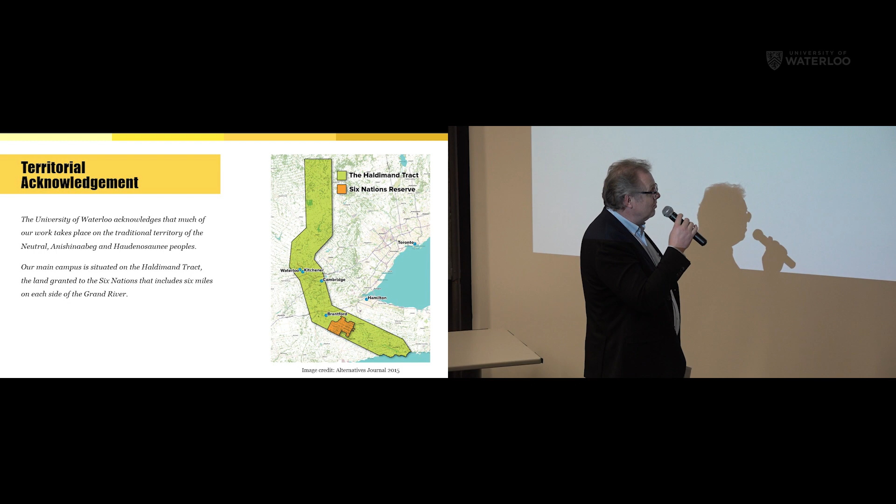So we're located on the Haldimand Tract, highlighted in green. That was granted to the Six Nations in the 1800s. It's 6 miles on each side of the Grand River, as you perhaps know, and a fraction of that nowadays remains, which is the Six Nations Reserve.

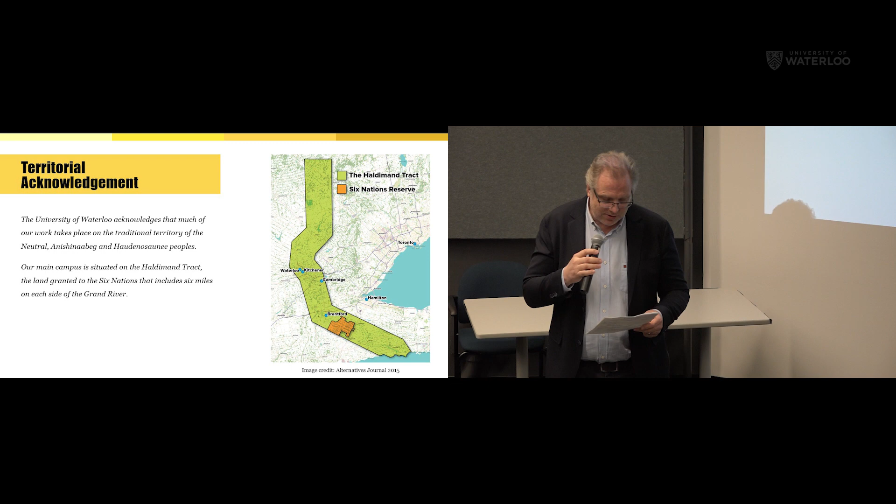So the University of Waterloo, the Water Institute that I represent, we work on the Truth and Reconciliation recommendations, and our work towards reconciliation takes place across our campuses through research, learning, teaching, and community building, and is centralized within our Indigenous Initiatives Office. So with this acknowledgement, I'm very happy to introduce the speaker of today.

Next slide. Yeah, next slide, please.

A guest of Professor Ponnu Kumaraswamy from Systems Design Engineering. He's not a fellow countryman, but he lives and works in a country where I originally come from, in a very big water institute called Deltares. It's one of the largest, maybe the largest water research center in the world.

We've had people from Switzerland in Europe here as well, from Eawag, which is another big European research center, where around 400 people work. There are twice as many people, I believe, in Deltares. So Dr. Bernhard Becker is a senior researcher and advisor there. And he's also affiliated with the Aachen University in Germany, not very far from the Netherlands.

I have a very short speaker bio sketch for you. Dr. Becker holds a PhD degree in civil engineering from Aachen University, where he is also still affiliated, and he has more than 13 years of experience working at Deltares, where he is a senior advisor and researcher and a hydro modeling expert. I think Dr. Becker will talk a little bit more about Deltares in his presentation.

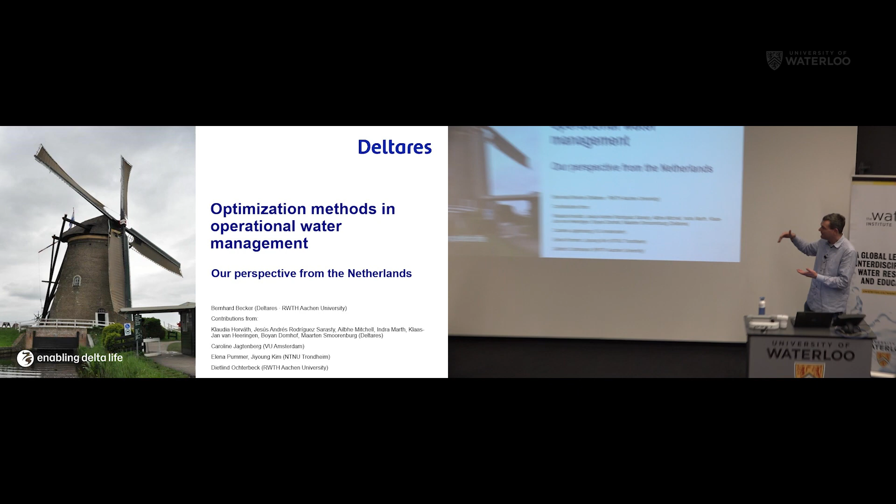But it's an event where water-related researchers and practitioners from all riparian states of the Meuse Basin, that originates in France, isn't it? Yeah. The spring is in France, Belgium, that's Wallonia and Flanders, and then the Netherlands, and there are also tributaries in Luxembourg and Germany, so many countries. Yeah, and this symposium is the 9th edition this year, so 10th anniversary. And you bring practitioners from all these riparian states together with the academic researchers to exchange knowledge on hydrological modeling of the Meuse catchment on a scientific basis.

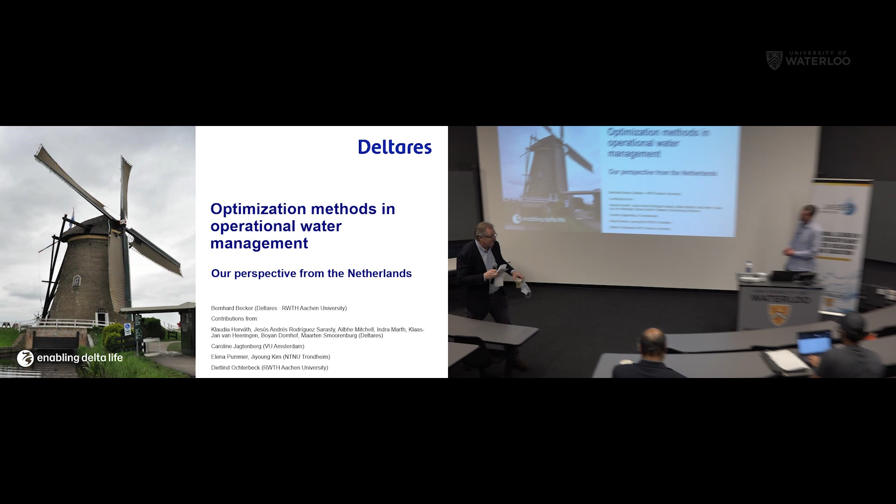Title of my talk is not the Meuse, but it's optimization methods in operational water management. And I would like to share some advances from our side, from a perspective from the Netherlands. Here you see a windmill. I think the Netherlands is very famous for windmills. Most of the windmills, you can see water here. They are not for grain, but they were constructed to drive pumps to drain the water.

Outline of the talk: a few words about Deltares, and then decision support for operational water management. Very briefly, the basics of optimization in operational water management. And then I have a few examples for reservoir optimization and goal programming, and also hydrological uncertainty, the ensemble optimization, and last item, nonlinear optimization for hydropower scheduling. And this is maybe the opposite of pump operations. Hydropower produces power and pumps consume power, but it's a similar optimization problem.

Okay, a few words or a few slides about Deltares. Deltares is an independent institute for applied research in water and subsurface in the Netherlands.

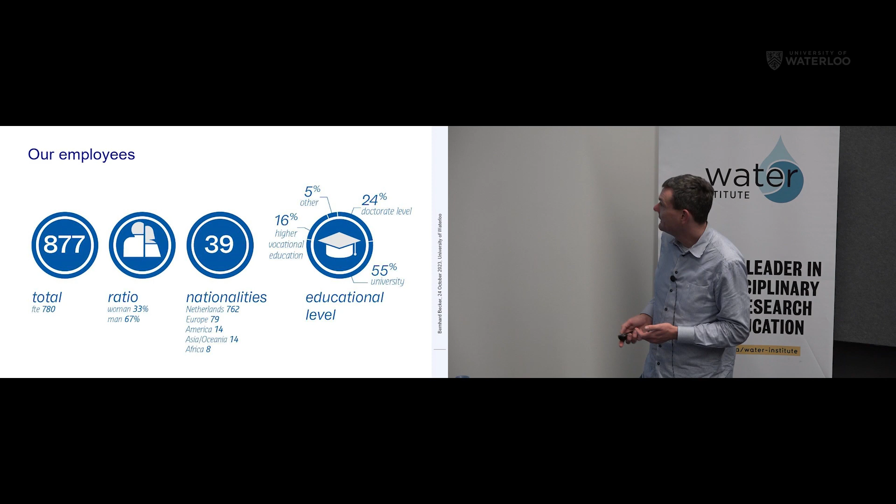Deltares has 877 employees, full-time employees it's a bit less. 1/3 female, 2/3 male, and 39 nationalities work at Deltares. The most from the Netherlands. I belong to the group of Europe. I'm originally from Germany, and quite a high educational level, I would say. Yeah, it's a research institute.

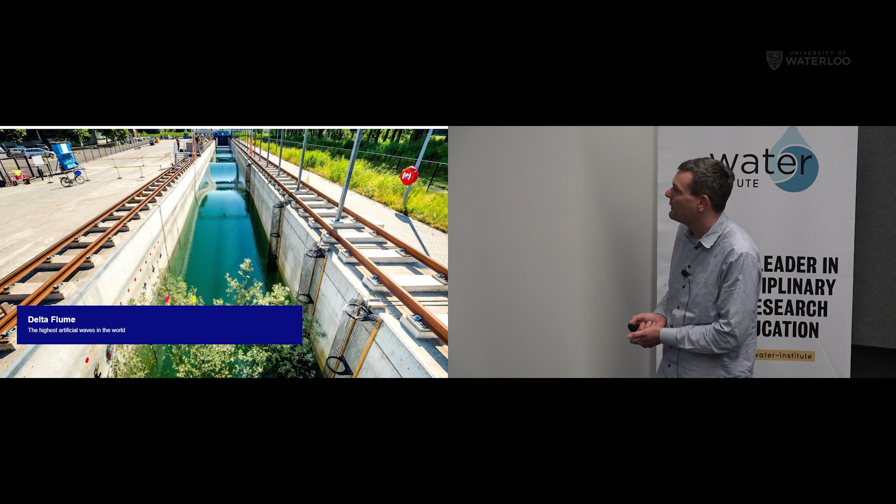We are very proud of the Delta flume. This is not the largest experimental flume of the world, but the one that produces the highest artificial waves in the world. And here you see the wave, and the question here is what the effect of plants is on wave damping, on coastal flood protection with plants.

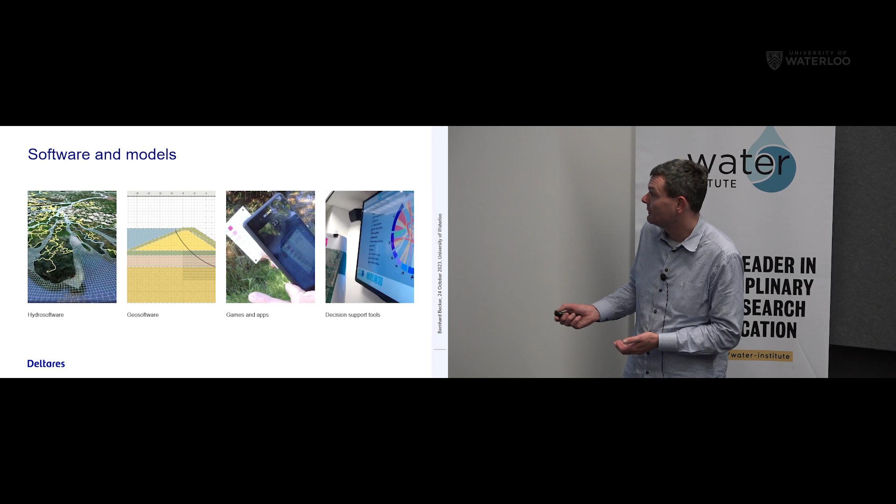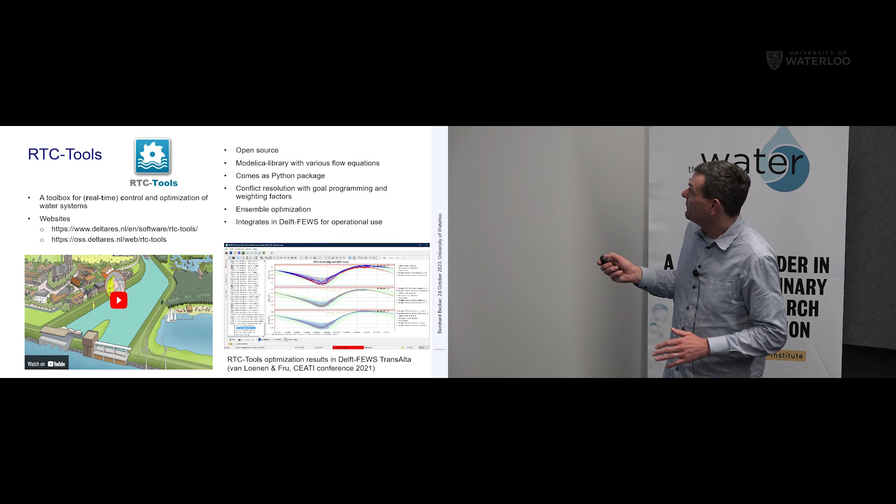And now RTC-Tools, that's a very small product, but this is about optimization. This is a toolbox for real-time control and optimization of water systems, also an open source product. I will not go into details now, but the next slides are related, in most cases, to RTC-Tools models. Yeah, decision support for operational water management. I brought some slides from a decision support system to give an idea why we are doing this.

The Netherlands is located below sea level, or most parts of the Netherlands, and this means that we have to drain the country with the help of canals and ditches. A pump station pumps the water up to canals, and from there it goes to the sea. Here the windmills, these are the historic pumps. Hundreds of years ago, there were no pumps with electricity or diesel engines. It was driven with windmills.

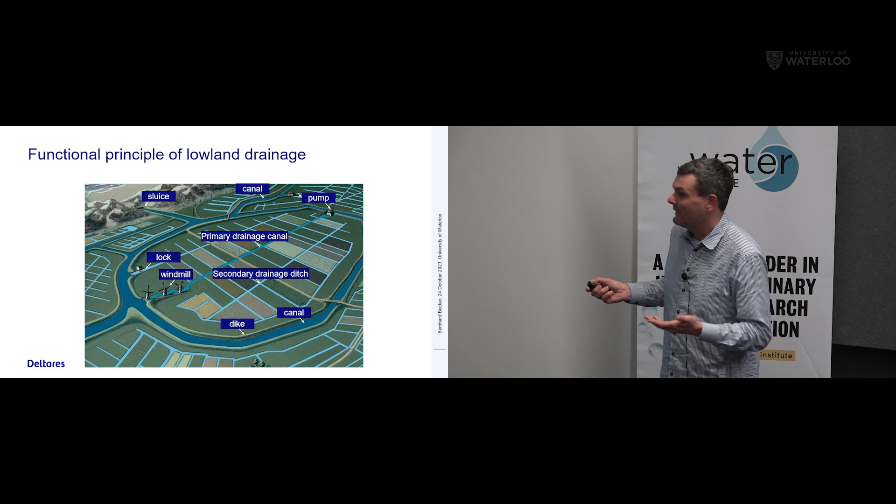And also the dikes are very important. So we look up to the water. Usually where we live, the water is above us and not below. The challenge is then that the water goes to the sea but not back. We don't want to have salt in these canals because this is also a freshwater resource. The regional water authorities are responsible for maintaining a target water level in the canals in the operation area.

And this is an example from Noorderzijlvest Regional Water Authority. There's a large sluice complex here to drain the water from the Lauwersmeer lake to the sea. This can only be done during low tide. And there are several pump stations arranged here at the major canals, and from there the water is pumped towards this reservoir. And this is quite complex management, and there operational decision support systems have been developed.

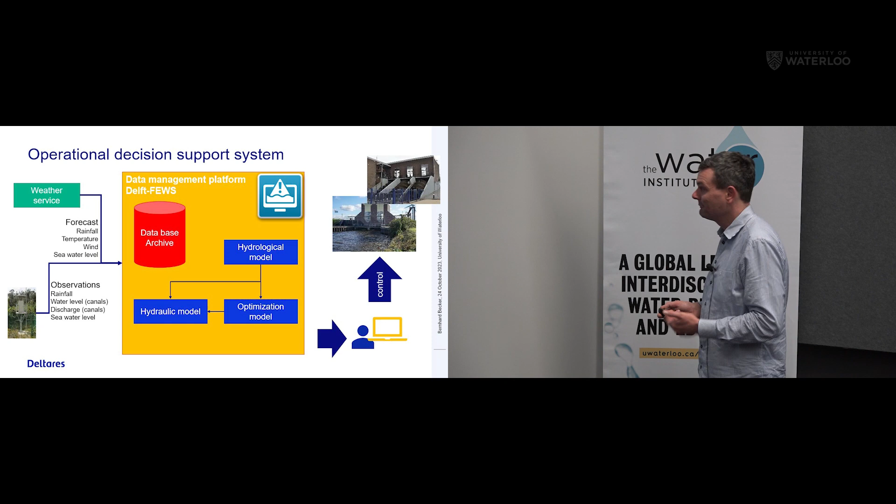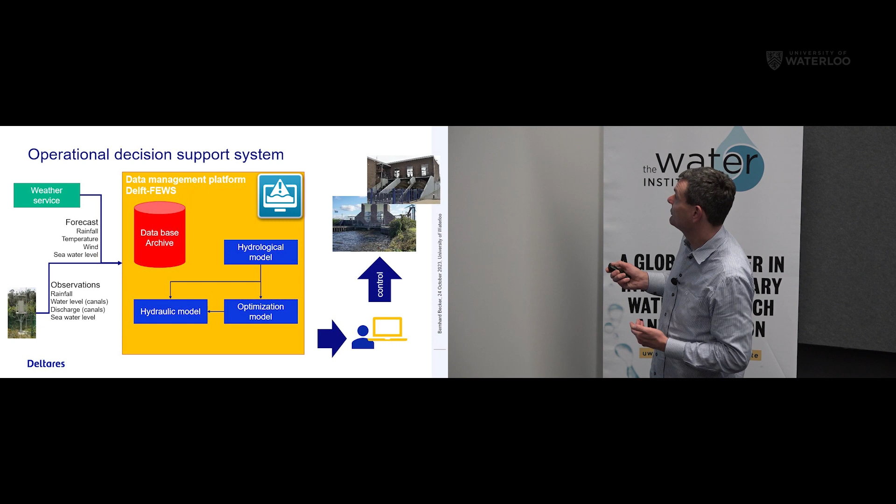Here's a simple architectural figure. The data management platform, this is the Deltares software, collects data from the weather service, rainfall, temperature, wind, seawater level, forecast data, but also observations. And then it creates boundary conditions for different hydrological or hydraulic models and also an optimization model. And these models are automatically executed, and the results should support the operators with decision support for control of these structures. Here a pump station and sluice.

This is a one-dimensional hydraulic model, and here with the time slider, the operator can look into the future, look at results for a future scenario, and then colors indicate if there's a bottleneck, a problem or not.

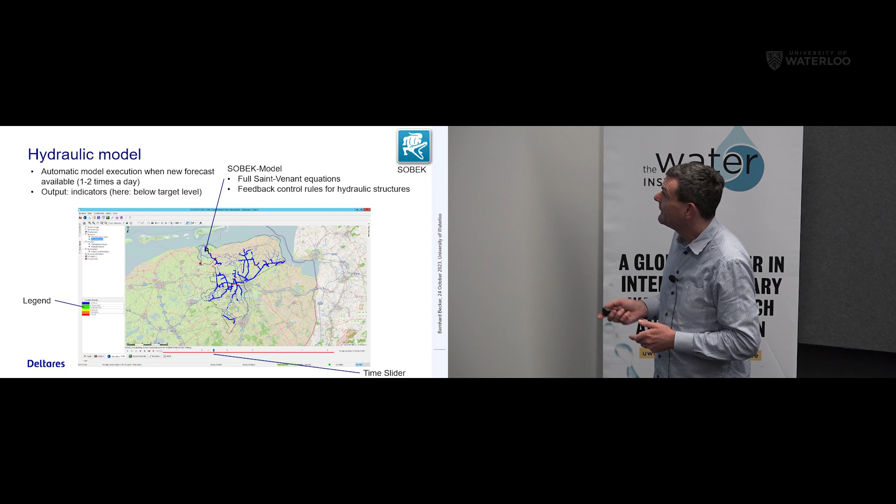And this is finally an optimization result created with RTC-Tools. Here you see the rainfall that is expected for the future. The vertical line is current time. Here we have the seawater level. You can see the tidal pattern.

And this gray line, that's the operational range for the inland water level. And here this line, this is the inland water level. It should be within this operational range. To achieve this, the rain falls onto the land, and it must be pumped out or with the help of the lock discharge.

And this is only possible if the inland water level is above the sea water level. But there are only a few time windows where this is possible. The rest of the time, here the pumps, blue and red, must operate. And here preferably we use gravity discharge via the sluice if possible, minimize pump costs, but preferably only during working hours.

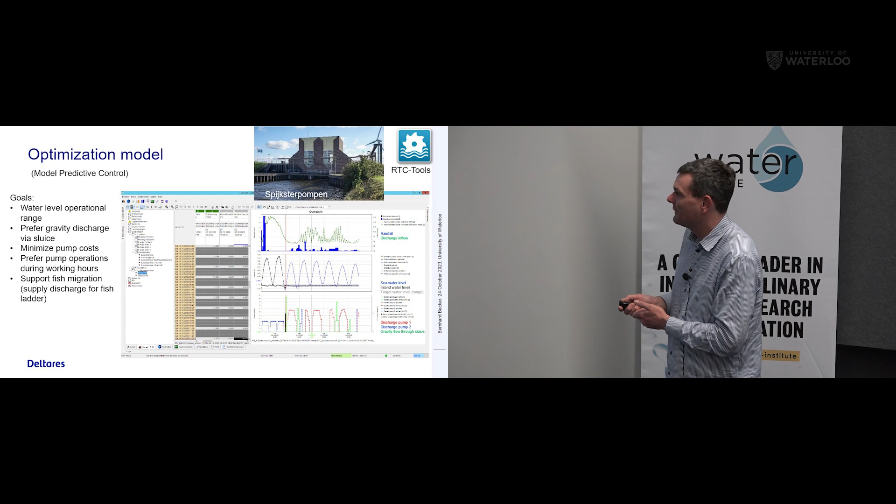And then we have also some obligations for nature, environment, for example, to supply a discharge for a fish ladder. This is to give a bit of an idea why we are using optimization techniques for water management. And water management here in this context is a time frame of one or a few days in the future. So it's not the whole year round. We look at the short-term time scale.

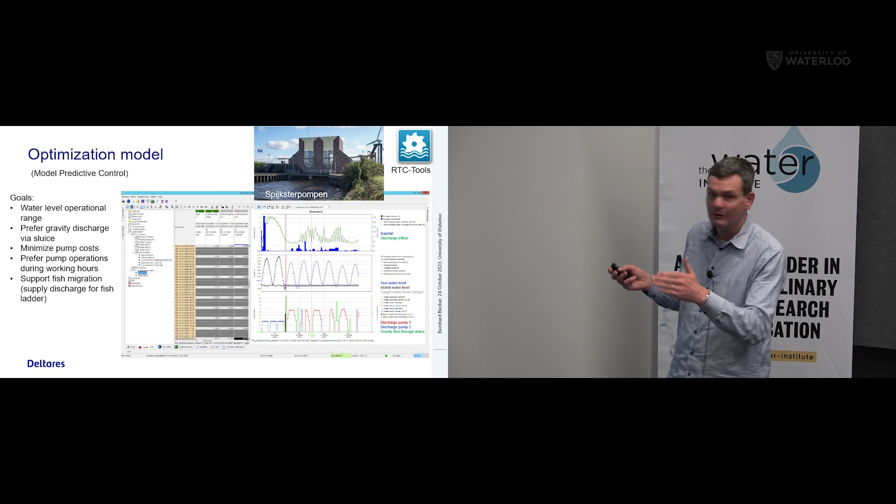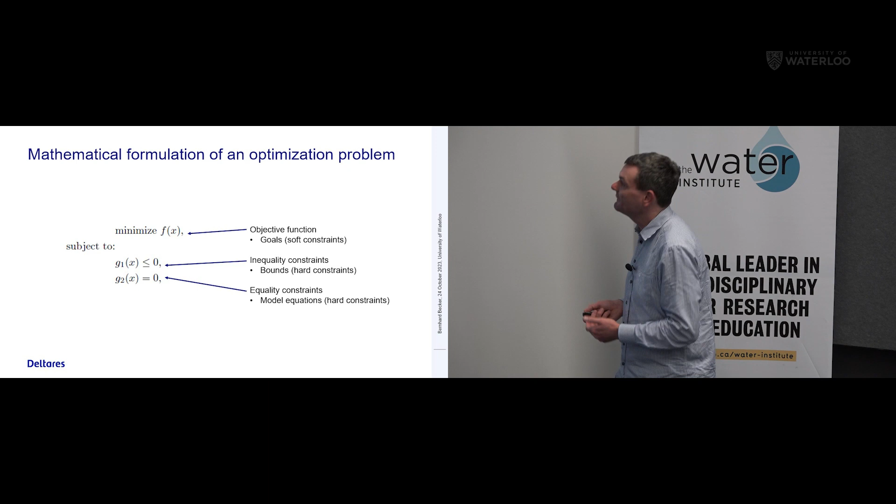And when we use optimization models for water management, we go for exact optimization, or mathematical optimization in a closer sense, and not the heuristic methods, because these methods can lead to a global optimum, or at least a consistent, stable result. I will say more later. Usually they are faster than heuristic methods, but the problem is that they come with mathematical restrictions. So it must be linear equations or a convex problem and all this.

Here, different optimization types. Heuristics don't come with a guarantee for a global optimum, and potentially a little change in input can produce a completely different result. And this is not helpful if you repeat the optimization a few hours later with a slightly different forecast; then you would like to have consistent results. But they are less restrictive in terms of mathematics. On the other hand, constraints cannot so easily be included. Techniques, maybe you're familiar with, are genetic algorithms, ant colony technique, or simulated annealing.

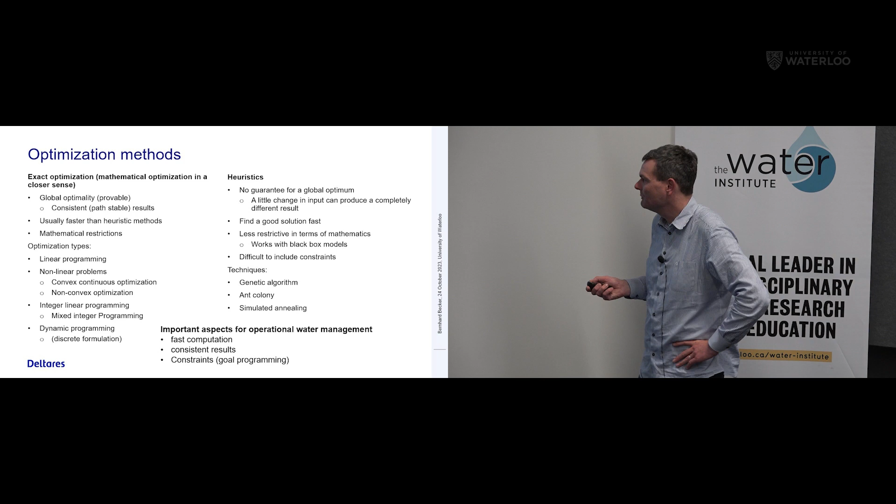But for operational management, we go for this because of the fast computation, consistent results, and constraints we need for goal programming.

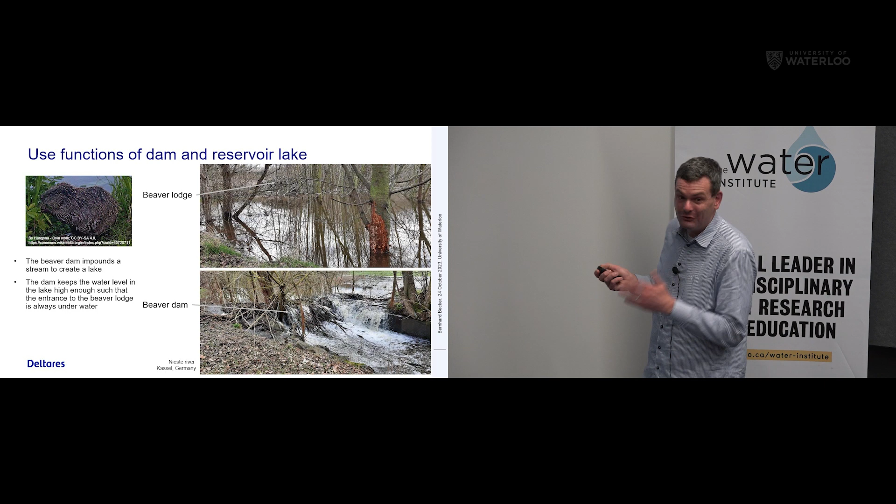Here's the next slide's example of a reservoir optimization model. Why are we doing that? Here's an example of a beaver dam. This is not optimized, but the beaver makes a dam to impound a stream to create a lake. Here's the beaver lodge, and the idea is that the entrance is always underwater.

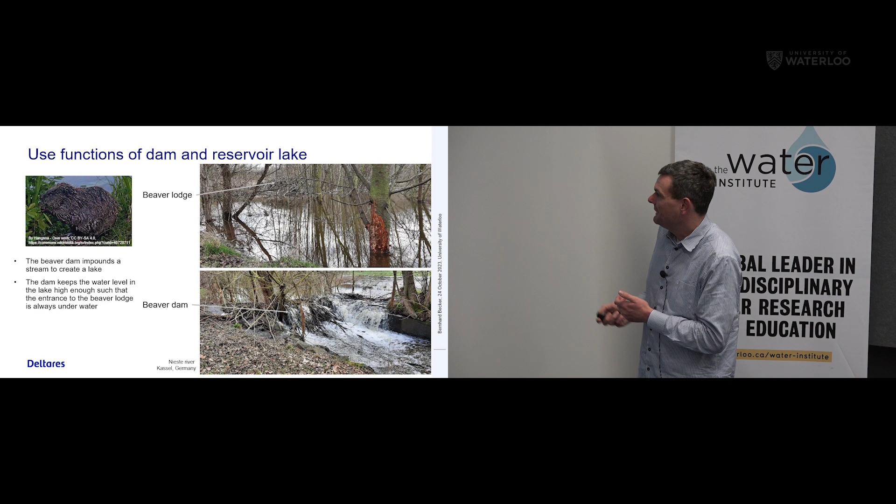For man-made reservoirs, it's a bit similar but more complex. For hydropower production, we want a high water level. Flood protection is another use case, usually in conflict with hydropower: the reservoir filling level should be as low as possible. So here we have a conflict, and that's where optimization comes in. Make best use of the storage volume and the water.

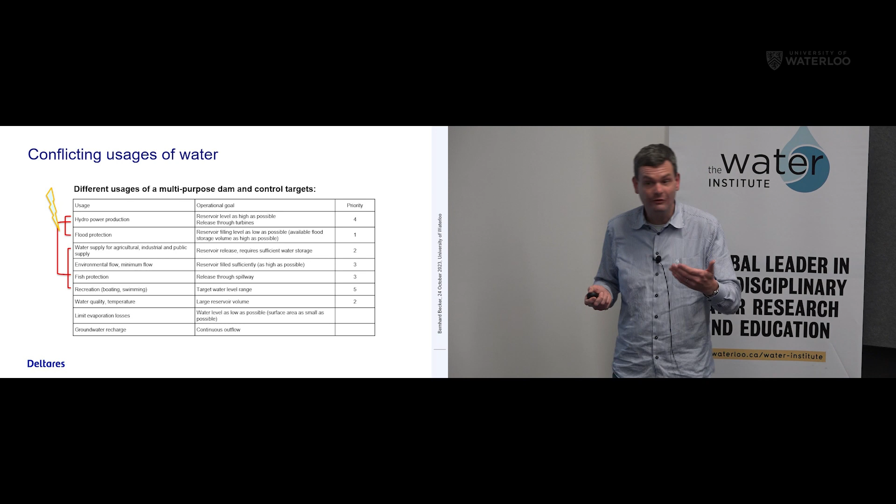Here's also a list of other possible use functions. And within the optimization, we assign priorities to these use functions. Typically priority 1 is dam safety, so the dam should not be destroyed during a flood, and flood protection.

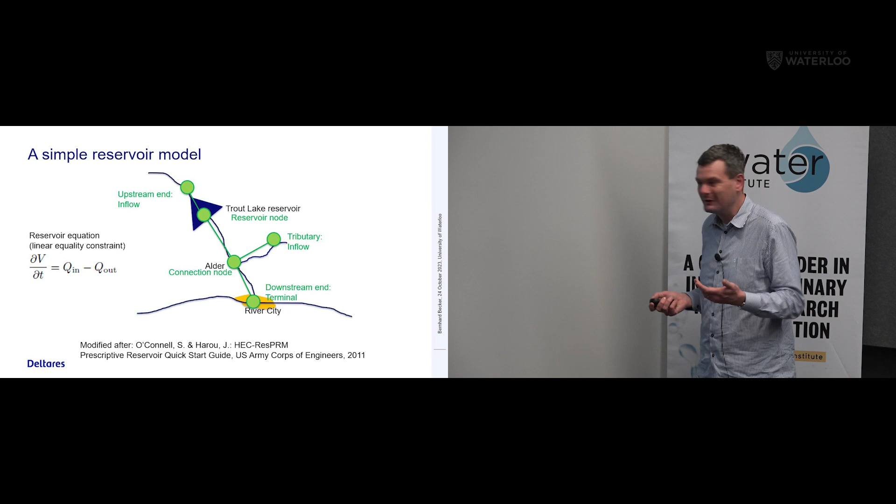Here is an example for a simple reservoir model. I took that from the HEC-ResPRM manual. I think it's a great example, and I learned a lot from that. Here is the reservoir equation: change of volume over time is inflow minus outflow.

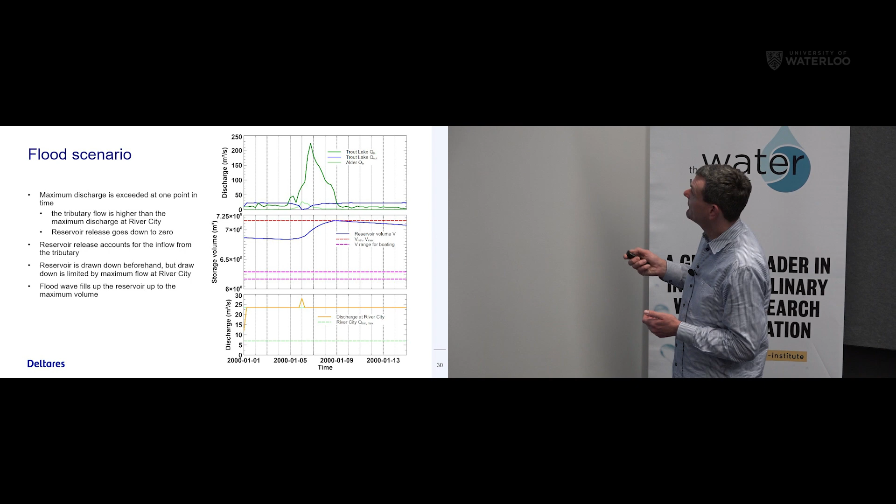And we have here a reservoir node with an inflow at the upstream end, then a river section with a tributary with another inflow, and then here's a city, the river city. And there we apply some minimum and maximum discharge condition. And a typical example for an optimization result, what we expect: here I have the green line. This is the large flood wave that flows into the reservoir.

And we have also a little flood peak here at the inflow from the tributary. And the optimization model now defines a release scheme that best matches the constraints or the operational goals that we have. Here we have a maximum volume with the volume over time. Here's the operational range. We don't meet that, but here, more important, minimum flow and maximum flow at the river city. Yeah, what happens here?

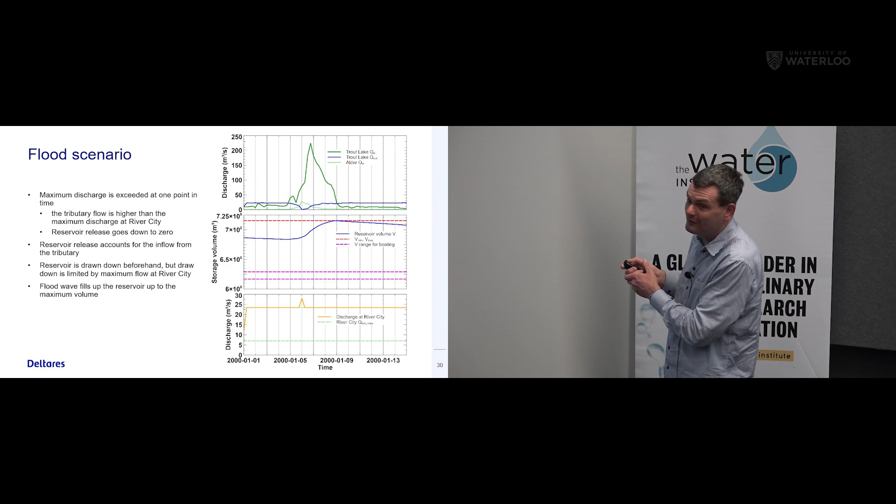The release accounts for the inflow, but also for the tributary flow, such that we don't exceed this maximum water discharge here, except this point in time. Here, the tributary flow is already higher than the maximum discharge. So there's nothing we can do about this, but the optimization model reduces the discharge to 0 such that this is minimized as well as possible.

There's also anticipation on the flood peak. So immediately the optimization model starts to drain the reservoir. So we see that the volume goes down such that there's as much storage as possible, restricted here, to catch the major part of the flood wave in the reservoir so we don't exceed the maximum volume here. So that's the anticipating behavior.

And then in the end, the optimization model tries to reach this operational range here, which is not possible within this short period of time. It's 2 weeks only. I think 15 days.

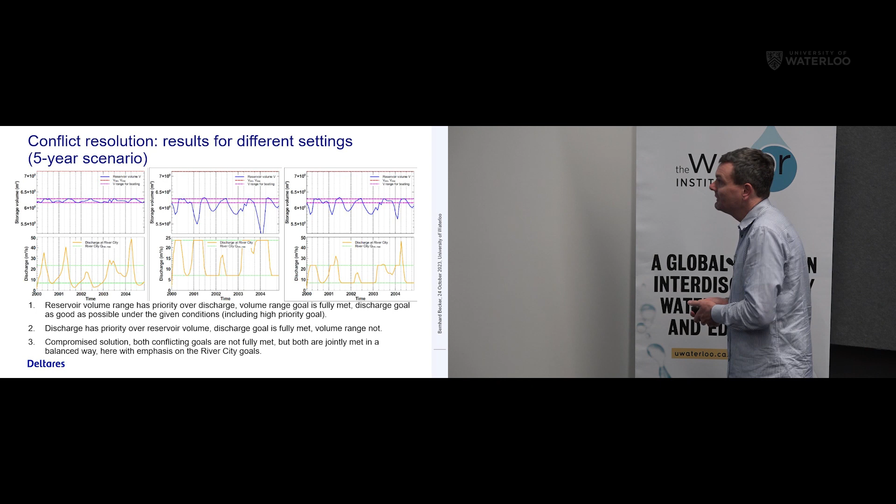Yeah, here's another example. This is a 5-year scenario. We have again the operational range and the river city minimum and maximum discharge. And here I have 3 optimization results with different priority settings. So these are options for conflict resolution. In the first example here, this operational range gets priority. Then we stay here within the bounds of the operational range, but we don't meet the goals here.

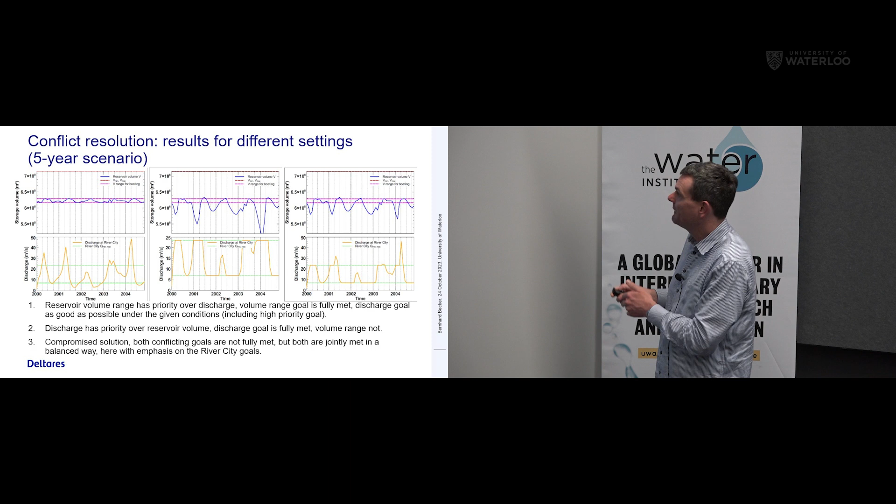We can also give priority, this number 2 here, to the discharge at river city. So then we don't exceed the maximum discharge, and also we have not violated the minimum condition, but then it's not possible to meet this goal. And this is the compromise solution, a bit of everything. So here we have weighting factors. Both goals have the same priority, and with the weighting factors we can tune the result a bit towards this goal or that. So here I have a bit of emphasis on the River City discharge.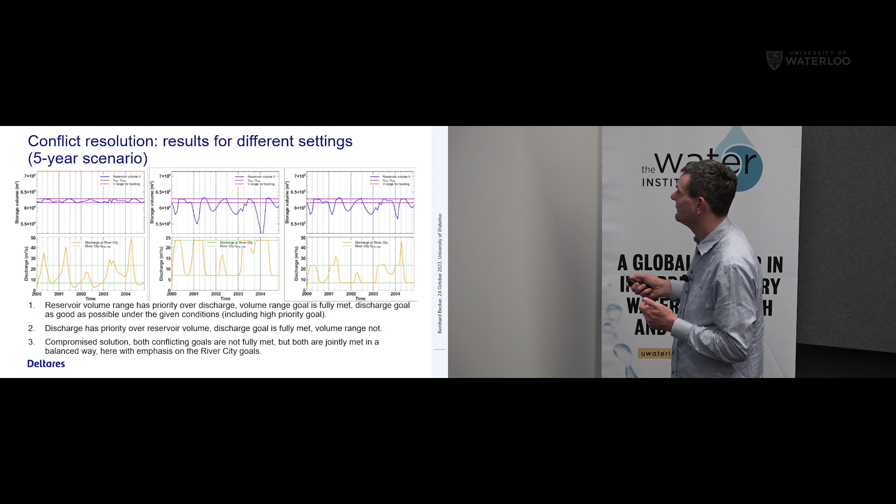Yeah, we do that with the help of goal programming. We order our goals in an ordered list according to priority, shown here, flood control, priority 1. And then the idea is that we sequentially optimize for one priority after another. And for each priority, so each line here, the result of the goal is then applied as a hard constraint for the next one. So this ensures that we aren't worse off for goals that we previously optimized for. And we still have a feasible optimization problem. What we want achieved is possible in the system, and it should not be worsened.

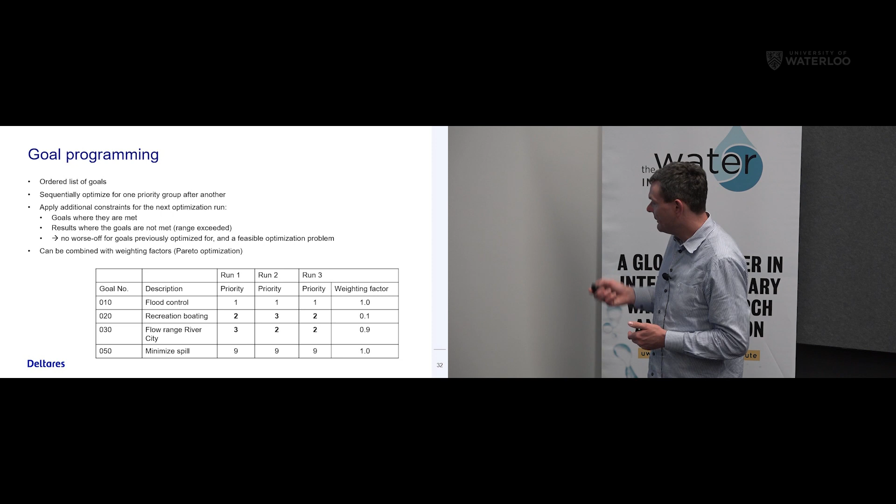And we can also combine that with the weighting factors, Pareto optimization. This is the third example from the previous slide. Here I have assigned a weighting factor of 0.1 for the boating range and a bit more emphasis on the flow range for the river city.

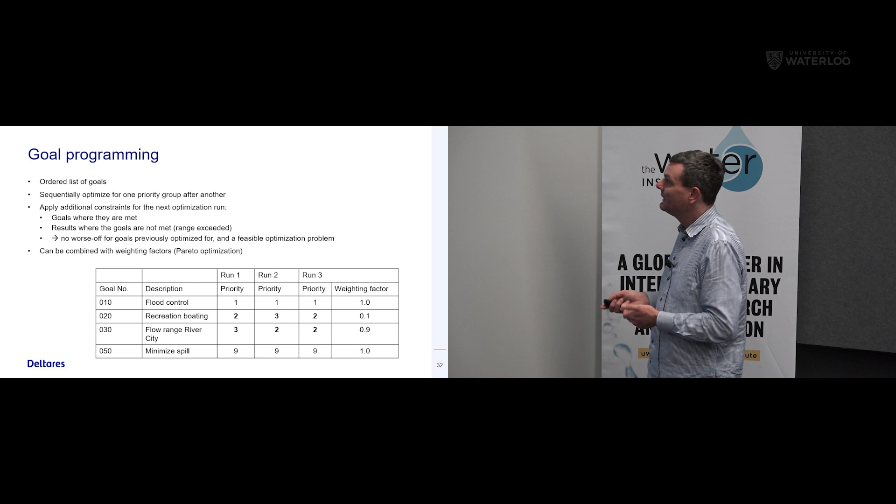So much. That was about goal programming. We have found that this is very helpful to explain results in practical applications, since many operators have clear priorities for their operational goals. So that's really a helpful approach.

Hydrological uncertainty, ensemble optimization, that's something we have not applied so much in practice, only 1 or 2 cases. So I'm also curious what you think of this approach, if it's useful for your applications, or maybe it's already covered with stochastic optimization. Yeah, we found also that it's very difficult to explain what the added value is.

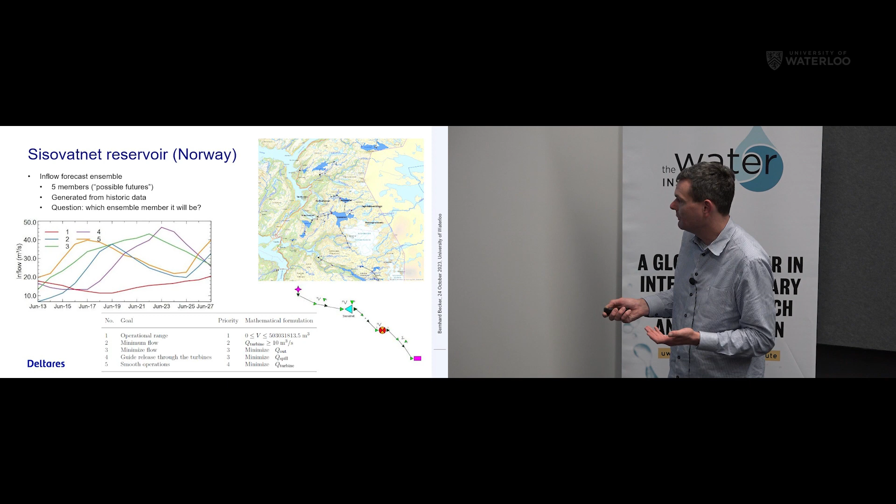And also, again, operational range, minimum flow, and minimize flow goal to keep as much water in the reservoir, guide the release through the turbines with minimized Q spill and smooth operations, minimize Q turbine. This is the model schematization, reservoir here, inflow, and we only look at the outflow this time.

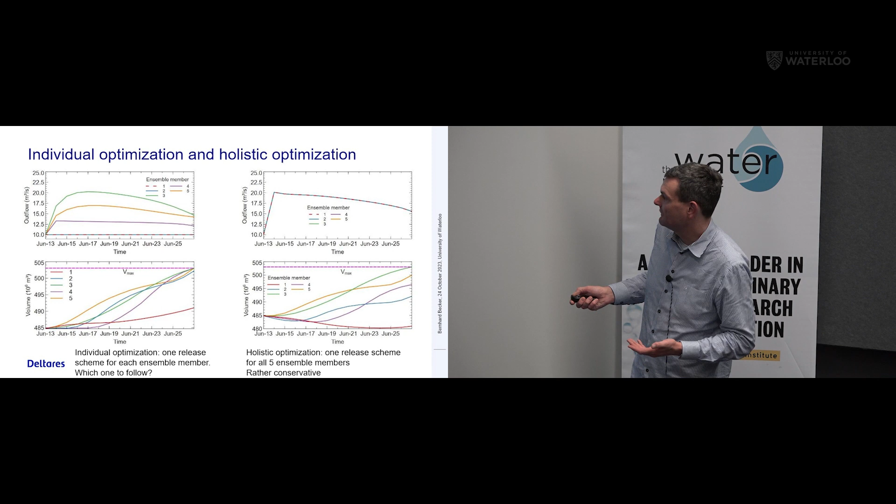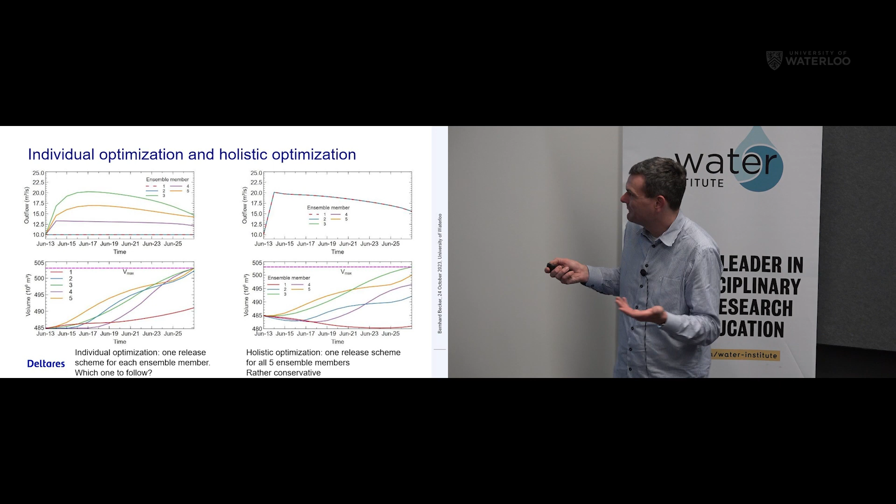Yeah, what can we do with this ensemble forecast? Straightforward idea is just to optimize for each ensemble member individually. So this is the standard optimization, and then we get 5 different, in this case, 4 different release schemes. This is release over time. And each ensemble member produces a different volume in the reservoir. So we start here and then filled up the reservoir up to the maximum by the end of the simulation period. The problem here, this is a perfect schedule or release scheme, but the operator still must decide which release scheme to follow. So it's not really a decision support, it more illustrates what the future can bring.

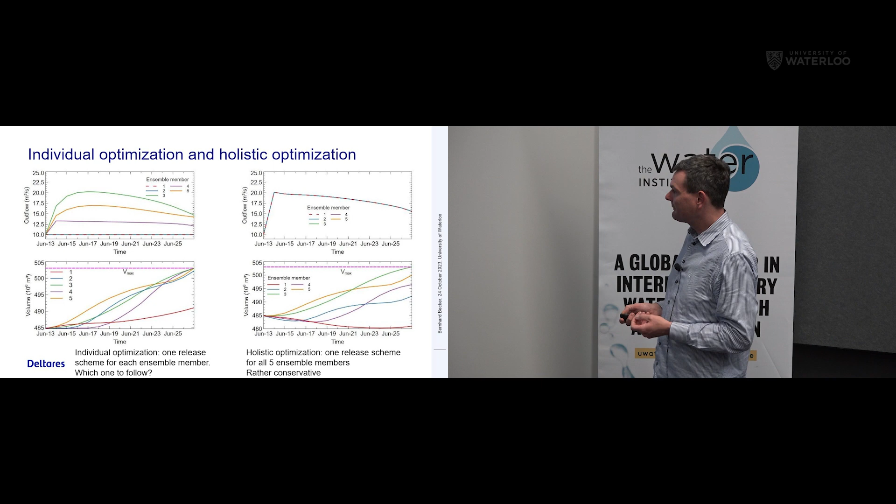And then an idea is to optimize a release scheme that fits to all different ensemble members. And then we have one release scheme here that fits all. The problem here is that it's rather conservative, and for this red line here, the ensemble member number 1, it even means a drawdown of the reservoir volume. So if the flood wave does not come, then we lose water. So that's why I said rather conservative.

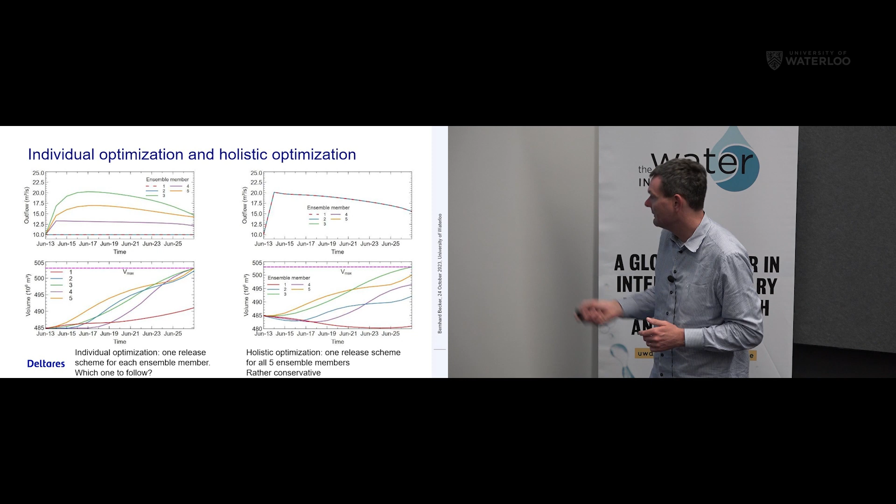And then some years ago at TU Delft, this tree-based optimization was developed with the idea to make better use of the ensemble forecasts. And the idea is to introduce branching points. Here at time step 7, there's a decision point, and similar ensembles are then grouped together, and we start with all ensemble members at once, and at time step 7, 2 of them branch upwards and 3 come to this release scheme. And the idea is that we don't find an optimal release scheme for each ensemble member, but for each branch. So then there's at least for the near future a clear decision support how to operate, and then maybe there's a new forecast available, we can decide again. Here's the corresponding volume over time.

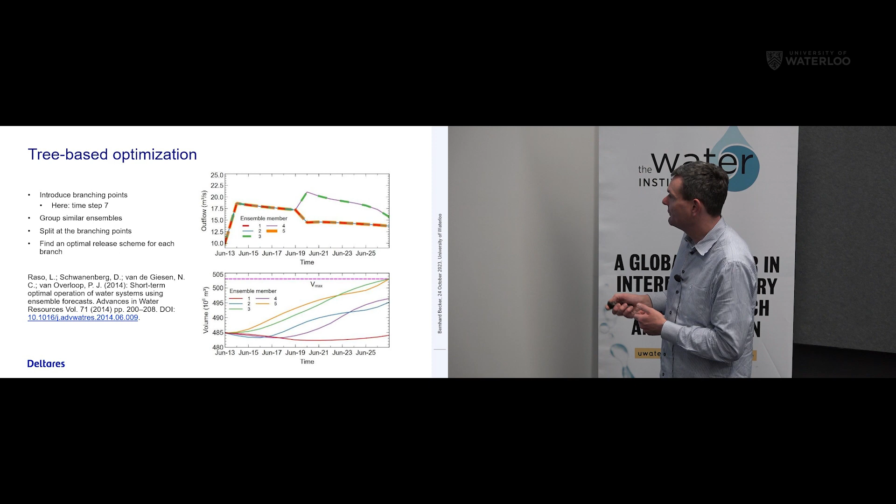But let's look for other options when we have not only one but multiple. Here in this case 3 branching points. Then here all start with a discharge of 10, and then the 2 most extreme ensemble members, they branch off, and then there's another branching point, and only one, number 3, asks to increase the release again. And for those who have just a little inflow, the discharge remains very low, so the risk of losing water is not so high anymore.

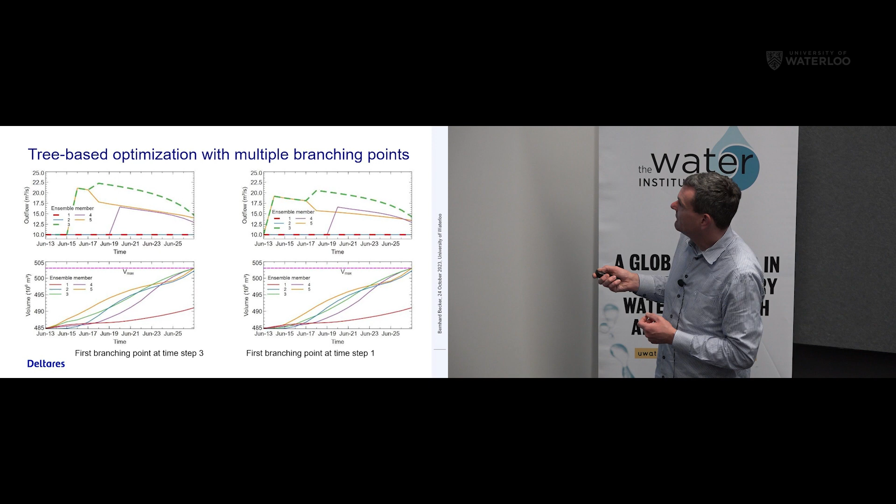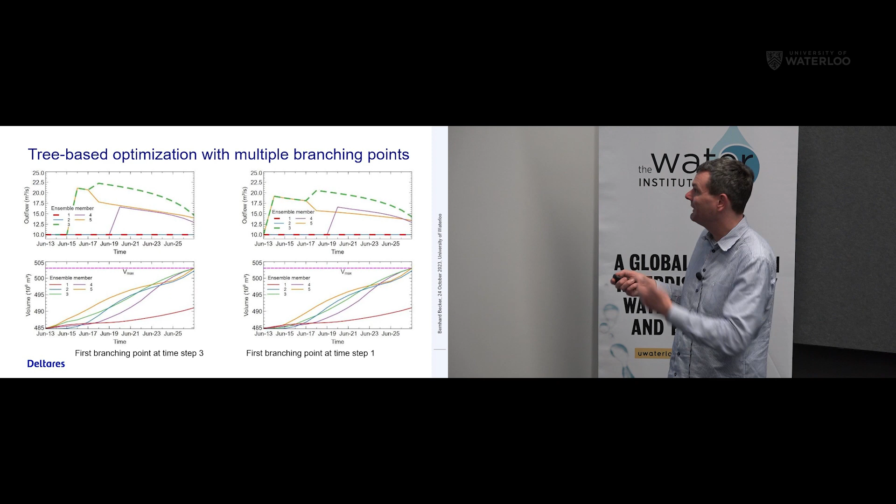Here is another example. The decision point is at the first time step, so immediately the operator must make a decision, follow this path or that one. Yeah, this is still something to deal with, and it depends on risk assessment. So for example, if there's very high flood damage expected downstream, then the operator could rather go for this path. And if the flood risk is low, then maybe can afford to follow this path. Here, 2 out of 5 ensembles point towards flood, and the other 3 not. So this is at least something to base a decision on.

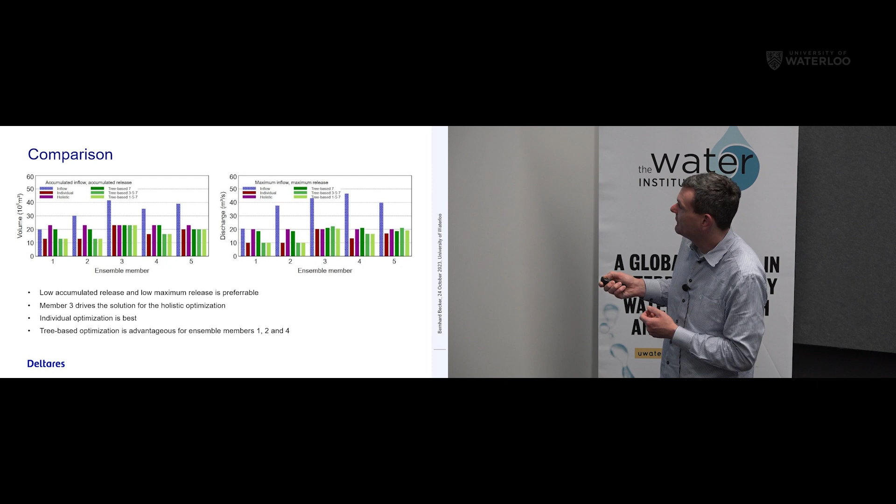But of course, the individual optimization performs best because then we have a dedicated scheme for each ensemble member. But we already learned this is not really a helpful decision support. But with tree-based optimization, especially if there's more than one branching point, at least for 1, 2, and 4, this is really an advantage that brings us close to the individual solution. So this is a way to support operational decisions here in flood conditions.

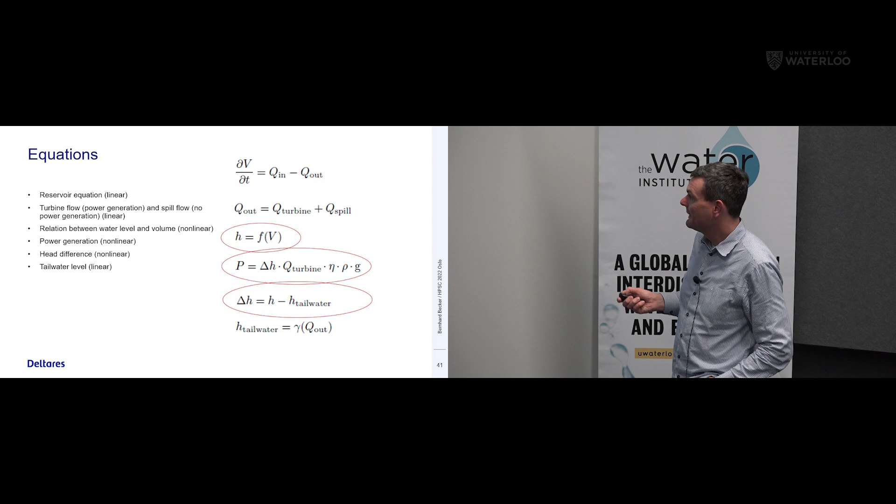The last item, nonlinear optimization for hydropower scheduling. Hydropower scheduling: we have used in the previous example only this equation, that's volumes and flows only, a linear optimization model. But when hydropower comes in, power is a product of head difference and turbine flow and the efficiency, which again depends on head difference and turbine flow, but here assumed to be constant. So this is non-convex and consequently nonlinear. And this is not easy to optimize to a global optimum with mathematical optimization.

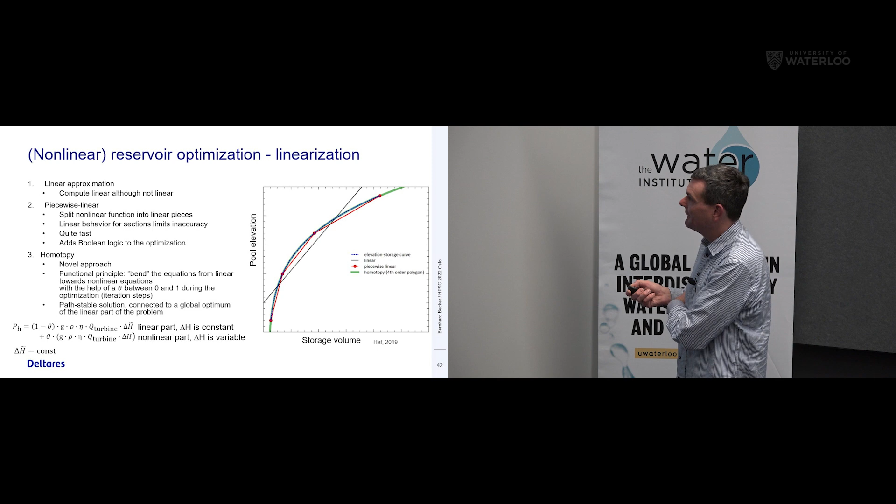What we can do, or what typical approaches are, is to linearize the problem. First idea, a linear approximation, compute linear, although the equation is not linear. Typically, the head difference is then assumed to be constant. That's a very common approach, but then we have a constant head difference. Piecewise linear: here this is an example for the pool elevation over storage volume, another source of nonlinearity. It's a bit easier to explain.

So this blue line is the elevation storage curve that we want to apply, and the linear approximation could be this. And piecewise linear, the red line, then we split it into linear domains. So then we have a more accurate representation of the equation, but we must tell the optimization model which domain to use, and this adds Boolean logic to the optimization, which makes it a bit more complex.

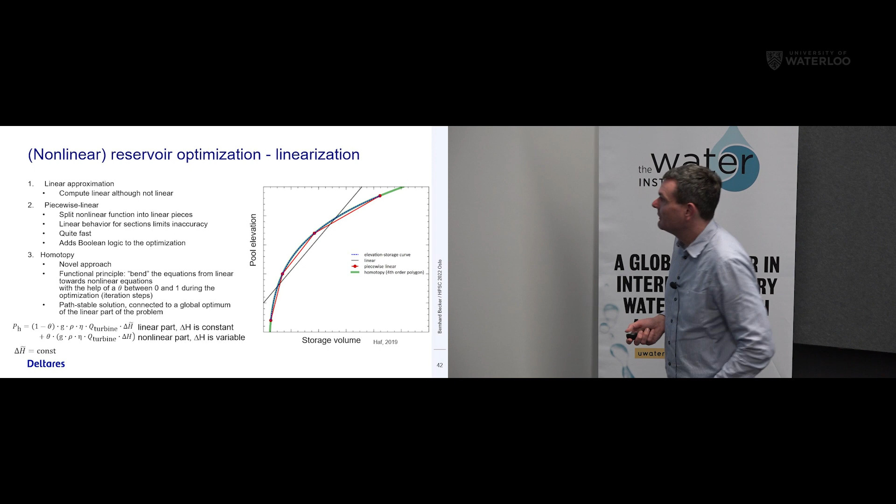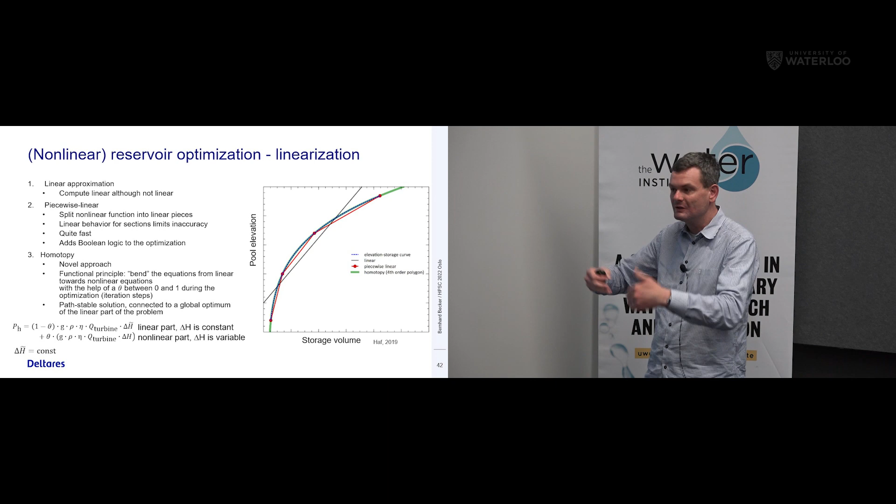And now we have developed the homotopy method. The green line. The idea is that we can really use the desired equation, and we split the equation into two parts, a linear part and a nonlinear part, with the help of this theta. Theta takes values from 0 to 1, and we increase it gradually in a kind of iteration throughout the optimization. If theta is 0, then only the linear part is present, and here this is treated as a constant value. And when theta is 1, this part is then 0, and we have the desired power equation with turbine flow and a nonlinear or dynamic head difference. So that's the basic idea.

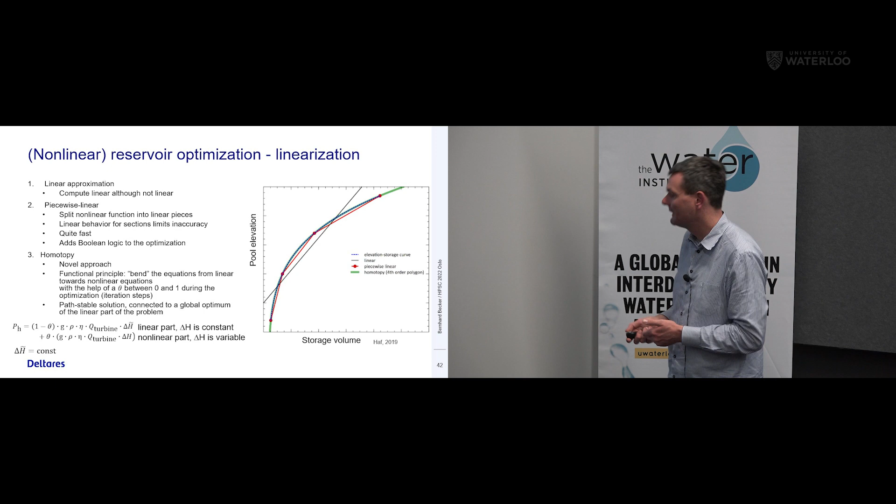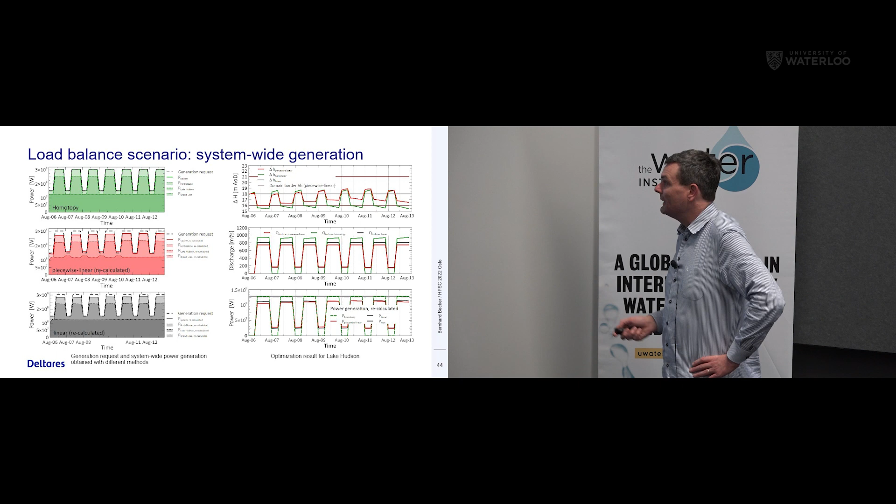So here are results from the 3 different approaches: homotopy, the piecewise linear, and the linear result. What we see here with the black dashed line is the energy demand, the generation request, and there's a day-night pattern for the energy demand. And the homotopy method meets exactly this demand. For the other 2 methods, we have here a deviation.

So the problem is that the optimization model thinks that it's perfectly on track for the generation request, but we have a constant head difference. But the head difference is dynamic. And we have recalculated the head difference and the power output with the optimization result. And this explains why we have here a deviation in the 2 linearization approaches.

And I think with this graph, there's also nice behavior here for the homotopy method. This is the head difference over time. And here the head difference changes. It goes down because we release water from the reservoir. So this changes the water level, and the head difference decreases. And the homotopy method is then the method that can compensate that by releasing more, such that we have here a horizontal power output. While for those methods that have a constant head difference, we end up with a decreasing power output here.

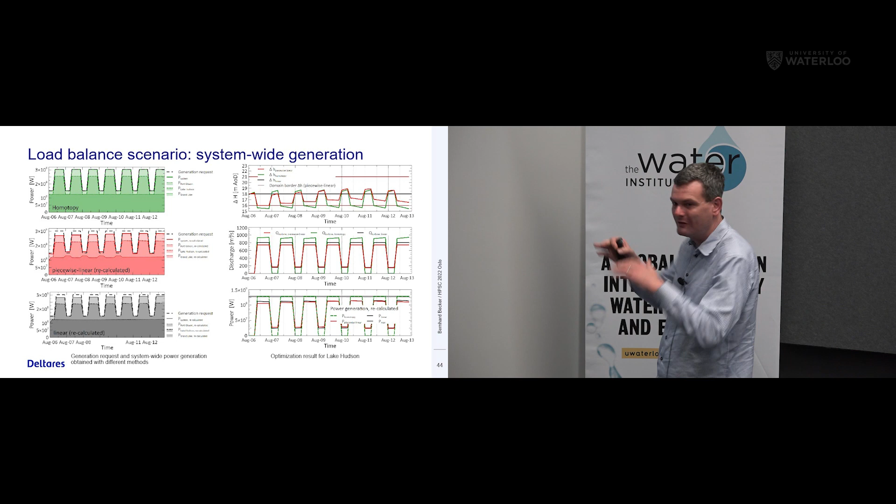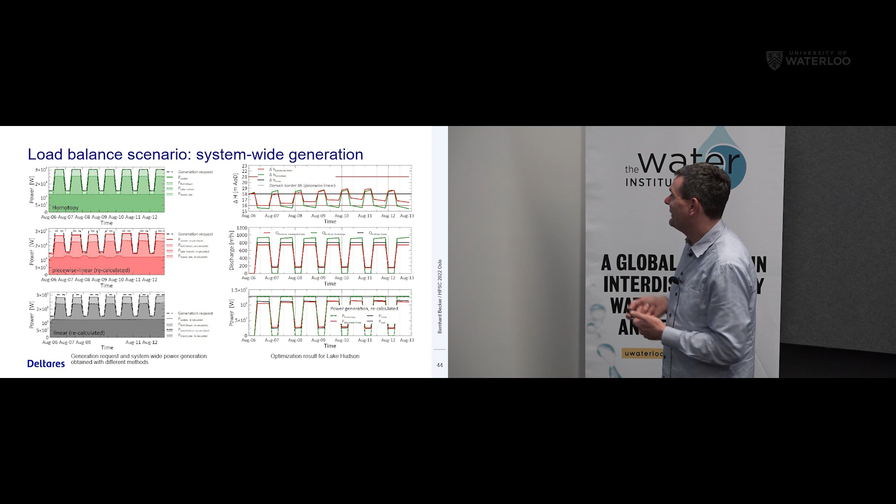So the problem here is the homotopy method does not come with a global optimum. It just has a path-stable solution connected to a linear problem. So it's not really a global optimum, but it comes with more accuracy. So that's a trade-off to make. We can optimize linear models to a global optimum, but then we lose some accuracy. So this is a trade-off to be made, but I think it could be at least an interesting approach for hydropower optimization for load balance. I think that was the last slide.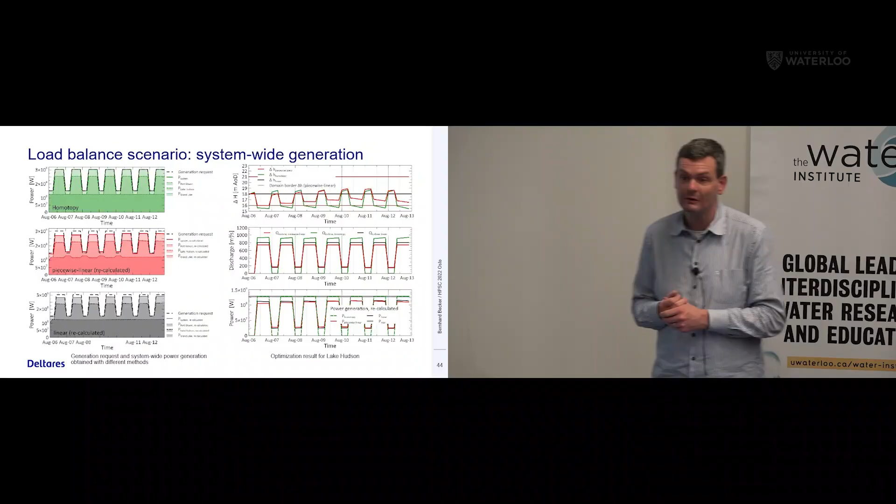And we will also make simulation models, for example, for such a recalculation or to refine the optimization results. Because we have mathematical restrictions, we cannot put everything into the optimization model.

Thank you. Other? Thank you for the talk.

So this is an uninformed question, but are you or others using AI techniques in optimization modeling and/or decision support systems, or do you ever see the application of machine learning in future? Yeah, that's an interesting discussion. We are discussing internally also. Yeah, this is what I've presented here as a physics-based model. So what we find important here is that the water balance is closed and that we have good representation of

the physical equations. But we think that artificial intelligence could be very helpful, for example, to make a forecast of the load, the power generation demand, because other factors than only physics play a role. For example, the day and night pattern, and there may be events like holidays where people use more or less energy. This is something we cannot put in physical modeling. On the other hand, the water flow equations are still valid. So I think a hybrid approach would be good, but we have no plans to include artificial intelligence into our optimization software.

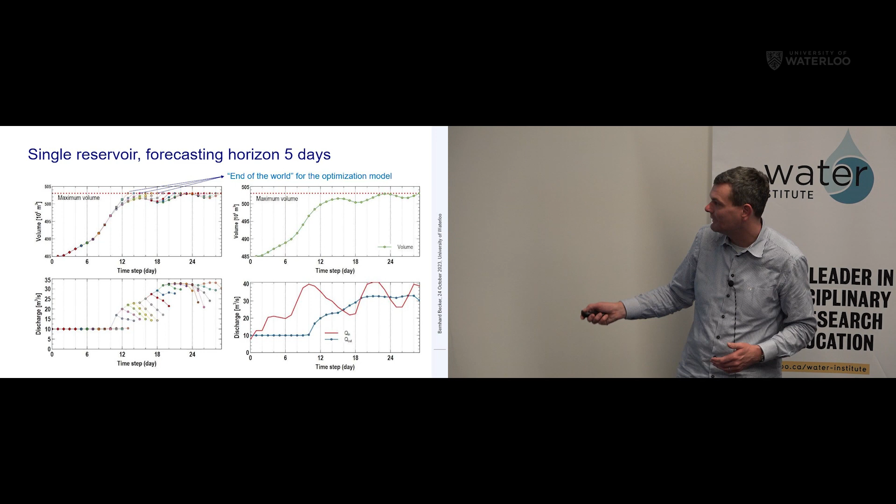So I can maybe show here some. This is an example. Here you see different optimization results with 5 time steps, and the first time step is used as an initial condition for the next optimization, and we move from one time step to another, and this is how the optimization develops. In principle, this is not a feature of RTC tools. We just connect different optimizations and conditions. But model predictive control is basically done with this shell of Delft-FEWS around.

So the operators get fresh data every morning, 8 o'clock. Then an optimization run is carried out. Then they decide on operations. And a few hours later or half a day later, we used to start with 1 forecast a day, but now we are sometimes in 15 minute intervals. But then with new data, a new optimization run is made. But this is not basically a feature of RTC tools, but I can also mimic that with a closed loop.

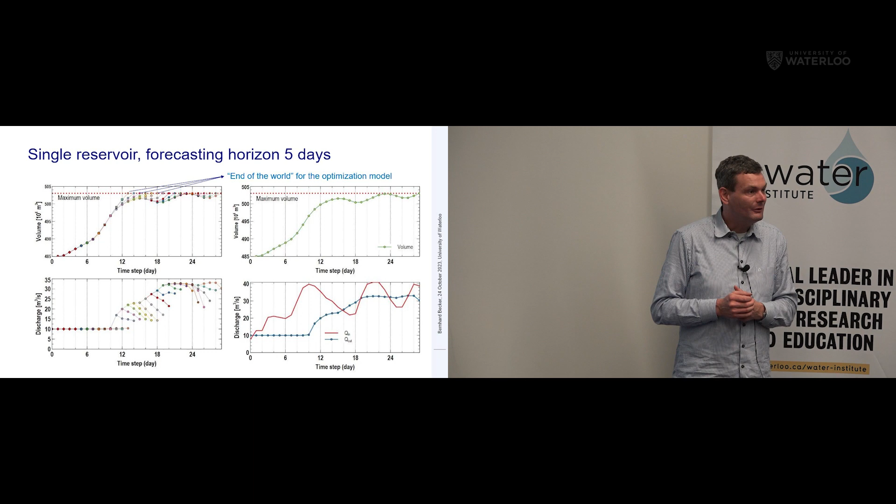It's a Python code, so I've also carried out some closed loop experiments. This is one example. I see. So in the first example about the drainage problem, right? Yeah. So you mentioned model predictive control, and the model is described by the Saint-Venant equation? Yeah. Is that correct?

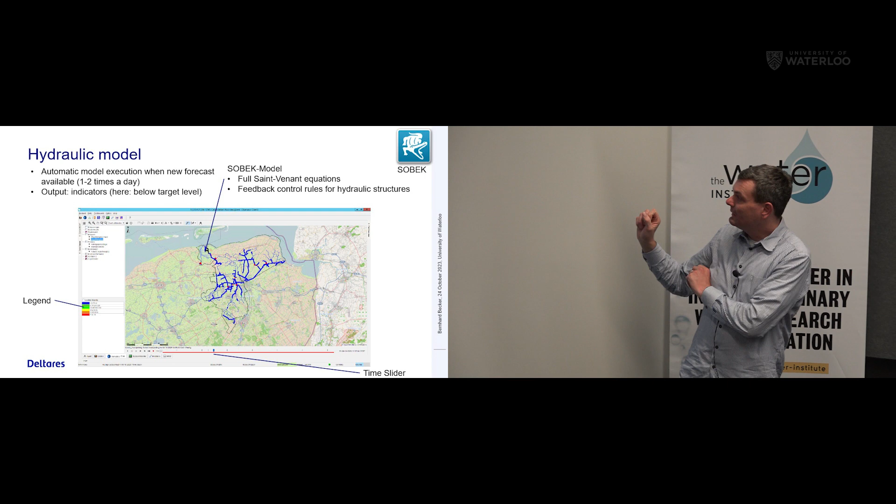I think you mentioned it's a full Saint-Venant equation. So this is a 2D equation, right? It's 1D. Oh, it's 1D. Okay, so that's feasible to solve. Yeah, and here there's no optimization involved in this SOBEK model. This is just feedback control.

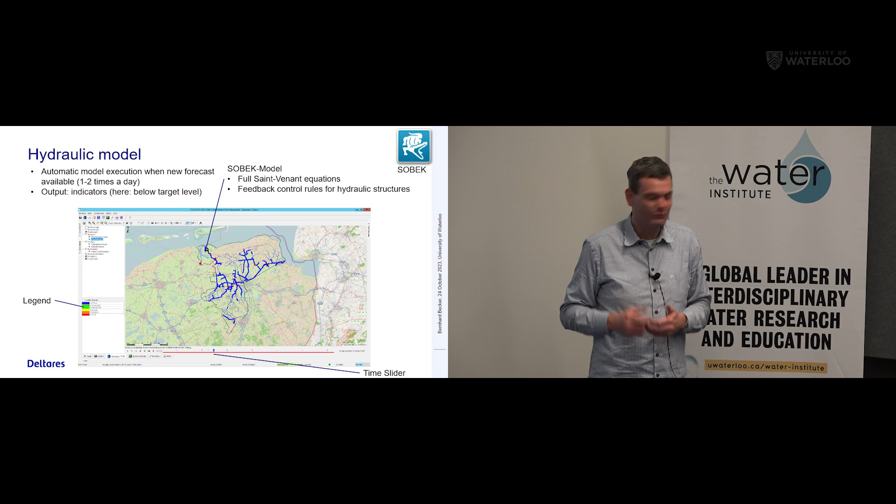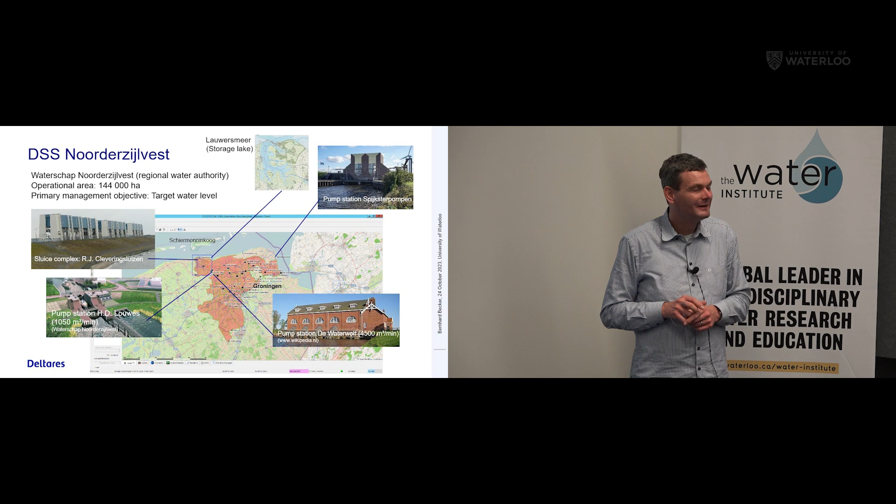Okay, so you don't apply model predictive control here? If optimization is an element of model predictive control, then it's not model predictive control. But with this one, it is model predictive control, because here an optimization model is used. Okay, so I thought model predictive control was giving the feedback controller. So in the previous slide, how do you construct the feedback control?

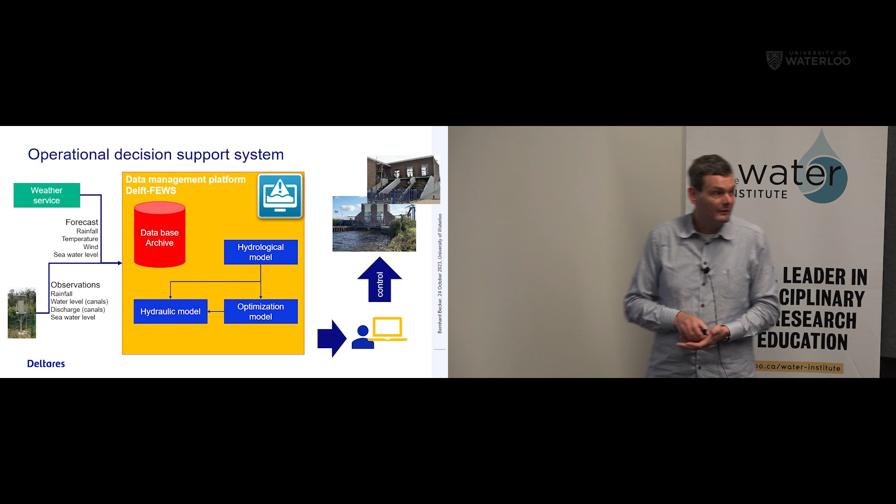Yeah, these are operational rules. For flood, it's sometimes very easy: if too much water, switch on the pumps. If-then-else logic. But the basic idea is we can start with a hydrological model. This gives us the load on the system in terms of rainfall, how much water we must drain. Then we feed that into an optimization model, and this creates a pumping scheme, but on a very coarse operational model. And then we feed this pumping scheme, so that's discharge over time, to the hydraulic model.

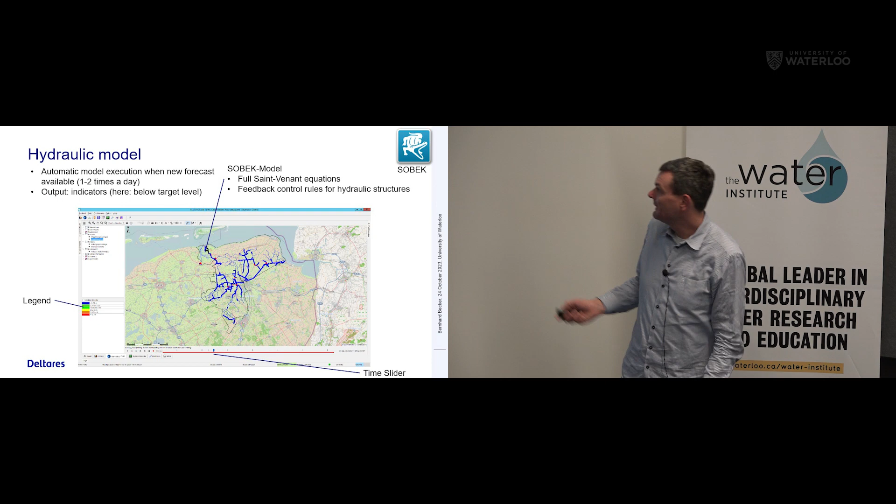The hydraulic model has much more detail, so the optimization model is maybe one node for such a canal, and here we have a node every 100 meters, so we can really model the water level. So then the optimization result is applied here as a time series for pump operations, and then we verify the optimization result with such a hydraulic model.

So I believe that the simulation models and the optimization models can be very different flavors, but it's very important to have both together. With this simulation model, we can verify if this optimized scheme really works, and then the operator can adjust: I think we need a bit more pumping or a bit longer, which is not covered in the optimization model. All right, thank you.

Thank you for the talk. Are there optimization techniques that either are specific to these problems or are perhaps more general but were inspired by the physics involved in this problem? Optimization techniques, you mean solvers or more? Yeah, for example, you mentioned the homotopy. That's the first time I've heard about it, so I was curious if it was something that came from this domain.

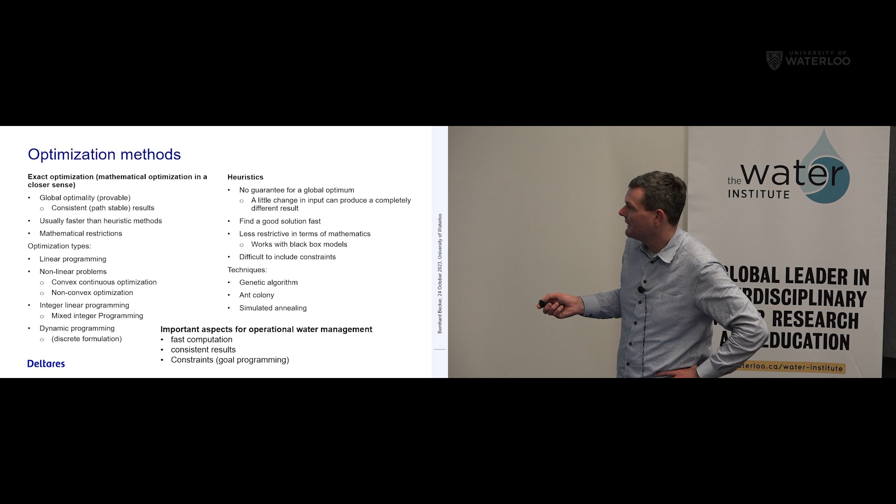I think we can say that linear programming and convex optimization are generic approaches that come with a global optimum, and non-convex optimization not, and one of these is the homotopy method, I would say. Pono, would you say that is correct? I mean, it means that the optimality is not guaranteed to be global. Yeah. But these are all generic optimization methods.

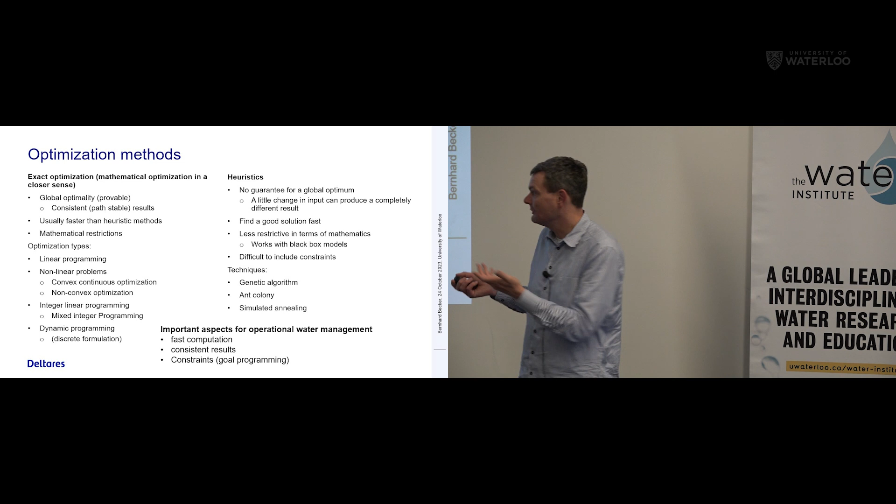And for our homotopy method, we have mathematical proof for the Saint-Venant equations and for the hydropower equations. If there are other equations, this should be tested or proven, but we have done that only for these two types of equations. Maybe that answers your question? And it also does not go with mixed integer programming, where we have if-then-else logic, Booleans. We cannot use the homotopy method for this, so it also comes with mathematical restrictions.

And indeed, our colleagues with an operations research background sometimes say it's maybe not really a mathematical optimization, because we have a seeding with this linear part, so it's still in discussion, I would say.